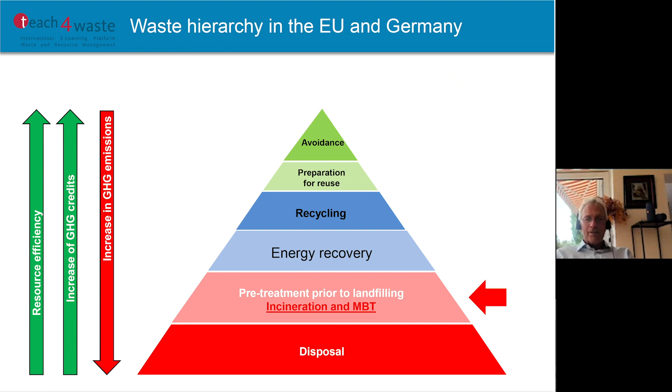So I hope you remember what I have said before in the last 5 minutes. I introduced MBT, what it is, and I talked about the learning objectives. I integrate MBT, that means pre-treatment before landfill, in the waste hierarchy we have in Europe. Then I come to the next slide, and from now on I will start again.

What are the targets or the objectives of treatment before landfill? You see some points, and I will highlight them in my presentation: minimizing of volume and mass, inactivating of biological processes, mainly the reduction of methane emission, immobilization of contaminants because of reduced leachate emission, recyclables—so take out some recyclables like metals and other components—and maybe to produce fuels from waste, RDF, that means refuse derived fuel.

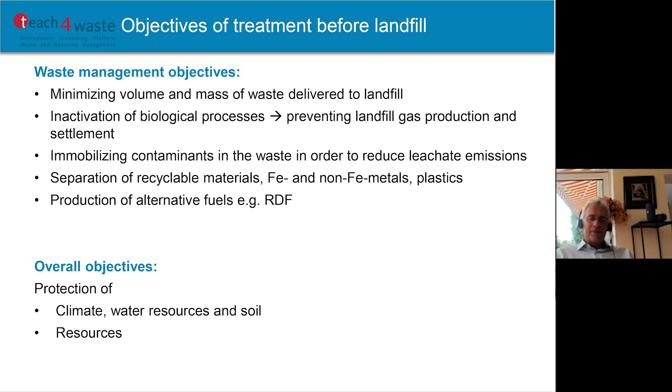But the overall objective of MBT, of treatment before landfill, is climate protection. This is the most important factor, and you will see at the end of this little presentation, I think around 20 slides, why this is so important.

What is the situation in Germany? So 75% of all these treatment technologies are thermal technologies, meaning incineration plants, and 25% are MBTs. We started with incineration in the 1950s, and with MBT more or less at the beginning of this new era—I think we started in the year 2000.

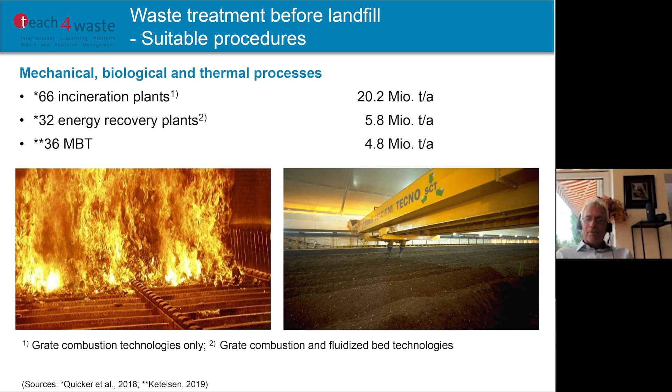But I will highlight today only MBT, because this is part of the biotechnologies we focused on in this little lecture. So the main point at the moment is what kind of limiting values we have for the material which we are allowed to dispose of on a landfill.

We have a special law in Germany created in the year 2001, and we have different laws and requirements for incineration residues—that means slag—and MBT materials. I will focus only today on MBT material.

We have a reduction of total organic carbon in the solid. That means we want to reduce the organic matter which could be degraded in an anaerobic way, so the potential for methane gas production. Second point, we have a limiting value for the wastewater area—the total organic carbon in the eluate—so you want to reduce the organic components in the leachate.

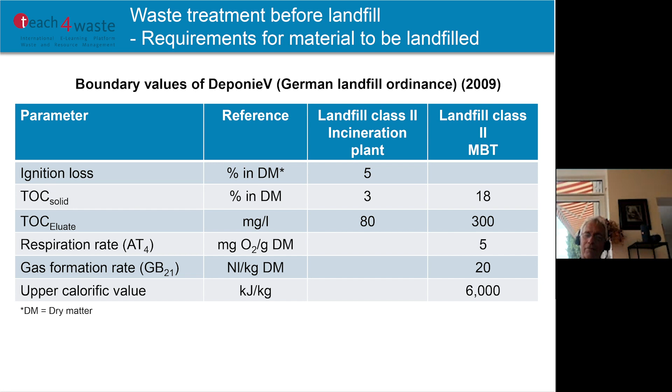Then we have two other parts of limiting values. These values describe or limit the biological activity of the raw material when you dispose of it. And at the end, there is a limiting value only for MBT—this is the upper calorific value. I will explain them a little bit more in detail.

So the first parameters are emission parameters—AT4, that means respiration rate, which tells you how many milligrams of oxygen you need in the material you want to dispose of. Sorry, I missed that here—you have to give in here oxygen, that means O2.

Alternatively, we have another limiting value: the gas formation rate during 21 days, that means 20 liters per kilogram dry matter. You have to know that fresh waste has an amount of around 200, so the requirement is to reduce the activity by around 90%. Both parameters can be used alternatively—AT4, the respiration rate in 4 days, and the gas formation rate in 21 days—the target is to reduce biological activity by around 90%.

And the same applies in the area of wastewater and groundwater protection—also a limitation of organic components. So this is one part of the limiting values.

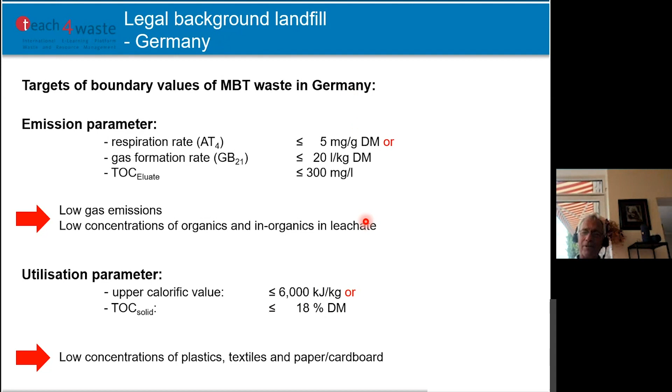So these are emission limiting values, and these are recycling-enhancing limiting values.

The next point: what are the critical components for landfills according to gas production? You remember, when you have waste and dispose of it in a landfill, after a short time you don't have any oxygen left in the landfill material, in the landfill body. So the kind of degradation changes from aerobic—the degradation process using oxygen—to anaerobic degradation, a degradation process without oxygen.

And this is the main problem, because this anaerobic degradation process produces, as a product, carbon dioxide and, I hope you remember, methane. And again, we talked in our first lecture about methane. Methane has a very high global warming potential.

You remember what this is? I hope. There are different kinds of numbers. So you have 25 or you have 28, I know some that are 30. That means the warming potential is, by a factor of around 25, higher than carbon dioxide. This is the definition of global warming potential.

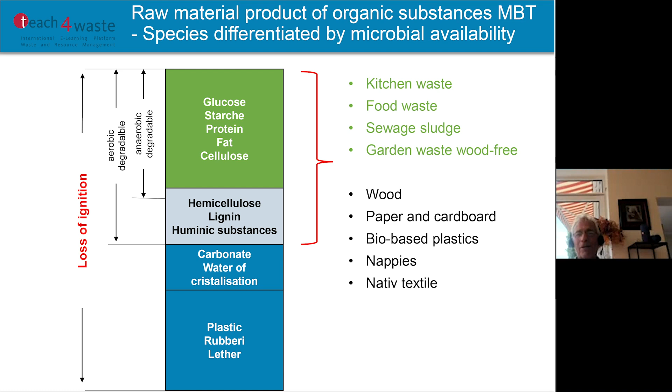And you remember, for example, laughing gas? Remember the number? It's around 300, or 298. This high global warming potential of methane is the biggest problem we have with landfilling untreated waste.

So you remember the technologies of composting and anaerobic digestion. More or less these technologies are all the same, whether you use them for the production of compost or for pre-treatment before landfill. The technology is more or less the same, so I don't want to discuss it in detail.

But the main point is: at first you shred the waste, you screen the waste, and in Germany you separate material bigger than 100 millimeters. There you have paper, textiles, plastic. The other components have a high concentration of organic matter, meaning biologically degradable components.

And you can screen it again, typically in Germany at 30 to 40 millimeters. The remaining plastic and wood you take out to produce high caloric components, meaning you produce a fuel. At the end, you have stabilized organic matter smaller than 40 millimeters.

This is again a typical technology we use in Germany. I think in Brazil there are other ideas. For example, I know some MBT technologies integrate a sorting step, either a manual sorting step or a fully automatic sorting step, so that you can take out plastics and cardboard. So this depends on the targets you have in your community and the targets of your MBT treatment technologies.

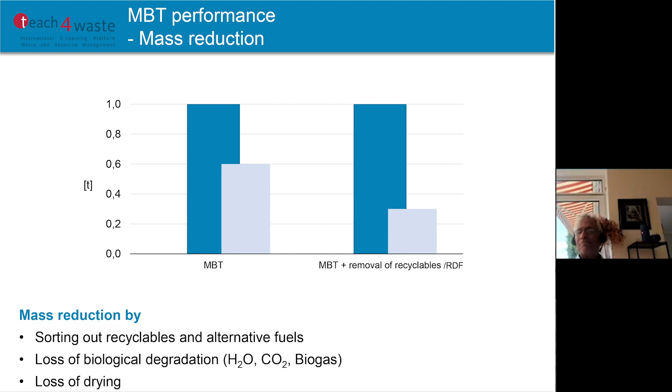And when you compare this, the mass reduction rate is more or less the same as incineration. Incineration also has a remaining amount of slag, around 30%. But you have to integrate, again, taking out recyclables or combustible components. So at the end, this is a combination of mechanical biological technologies with incineration technologies. This is typical for Germany, and I think in the long-term view, you will have it also in Brazil.

So the second point, the second requirement, was to reduce the volume required for landfilling. And in this case it's very important: on one hand you have the mass reduction, but as a second parameter you need the installation density. That means, what is the density of the material you dispose of on the landfill? If you have raw material without any treatment, you have only 700 kilograms per cubic meter.

And when you install it with a caterpillar, if you take a compactor, you can achieve much higher densities, around 0.9 up to 1. But if you combine, for example, compactors with MBT material and taking out the plastic components and so on, then you have an installation density around 1.3 up to 1.6.

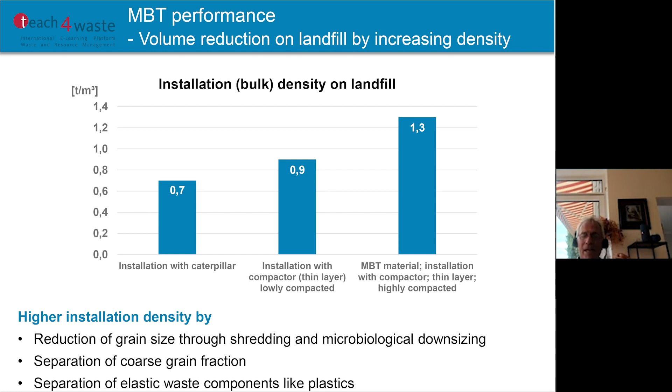And when you combine these two steps, these two parameters, mass reduction and lifting up the densities, at the end you see this as a result.

Requirement of landfill volume per 1 ton of waste: untreated waste is 1.1, MBT with 40% mass reduction gives 0.46, and with removal of recyclables and combustibles it's 0.23. That means a factor of 4 to factor 5.

This is a very important part for the target of MBT, or in general in waste treatment before landfill. So this is the information about mass and volume reduction.

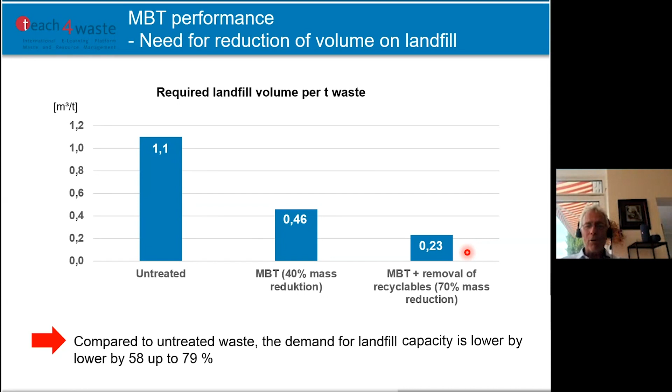Now we look at biological stabilization. Here on this slide you see the GB21 value, the gas formation potential, or gas formation in the fresh material, and its development during aerobic treatment. Here you see the aerobic treatment time.

You achieve, for example, the limiting value of 20 liters per kilogram dry matter. You achieve this number after 8 to 15 weeks.

For Brazil, it's a question whether it's necessary to have this very strong limiting value of 20, or maybe 40 or 60. Here you see what kind of remaining gas potential you have.

Christiane and I have worked with your environmental ministry and gave some recommendations for this limiting value for Brazil. We said maybe it could be totally okay to say 40 or 60 when you add later on a landfill a so-called methane oxidation layer. I will explain a little bit later.

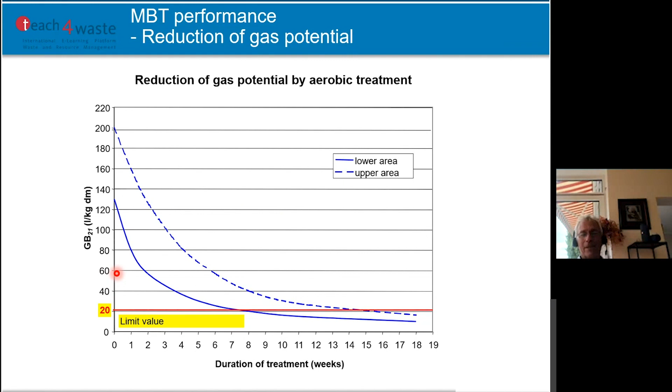Because MBT with this methane oxidation layer at the end has, in the result, the same effect. So it could be very helpful if we take other, somewhat higher limiting values. But I will explain a little bit later.

So again, untreated waste has around 200 liters of biogas per 1 kilogram of waste. MBT material has at the end a reduction of around 80%. We will talk later about this methane oxidation layer.

When you see this number, 200 liters per kilogram waste, or per ton, and transfer it to the global warming potential of 25 or 28, then for 1 ton on landfill you get an amount of methane gas, of CO2 equivalent gas, around 1 ton 700. So 1 ton of untreated waste emits around 1.7 tons, or 1700 kilograms, of carbon dioxide equivalent.

This is the problem and the biggest requirement. We have to reduce this extremely high amount.

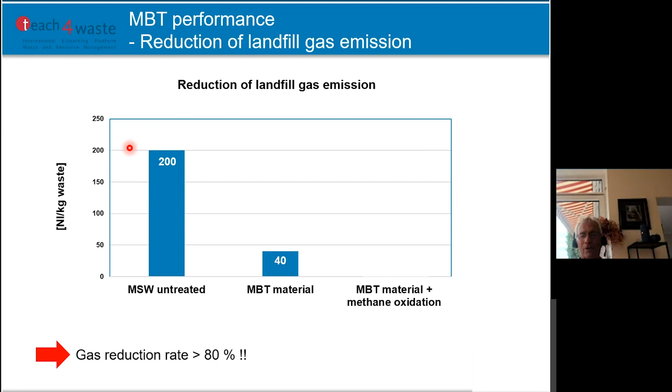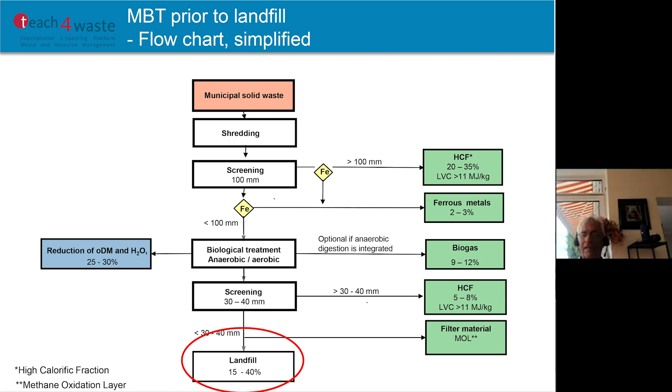So what can we also do with the components we stabilized in the biological treatment? We can produce a special filter material, a special filter layer. When we screen it by 30 to 40 millimeters, the fine grain is more or less a compost, and you can use this compost as a filter material.

For example, you have in this area your landfill. This landfill body produces methane. This methane is brought into a gas diffusion layer, and this gas will integrate into the filter layer.

This filter layer is around 120 centimeters, but in these filter layers we have, by way of diffusion, oxygen. In this process, in combination of methane with oxygen, we have the oxidation process, so the methane will be oxidized.

The methane will be oxidized up to 100%, but only when the amount of methane is low. So you can't use this oxidation layer for raw material or for a fresh landfill, because in that case the methane emission amount is too high.

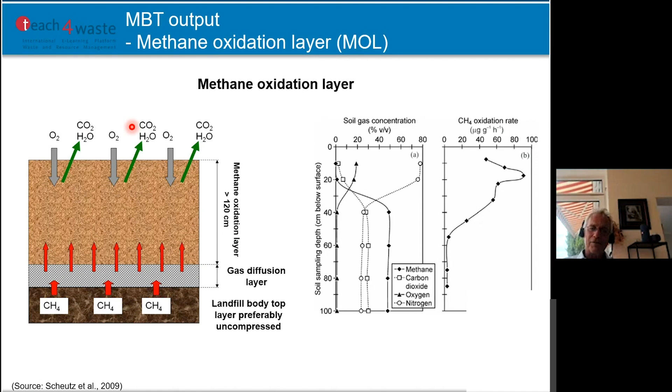Again, when we have a beginning of 200 liters and around 80% reduction by MBT, and a further reduction up to factor 4, we have a reduction of more than 90% by the combination of MBT and the filter material. So up to 90%.

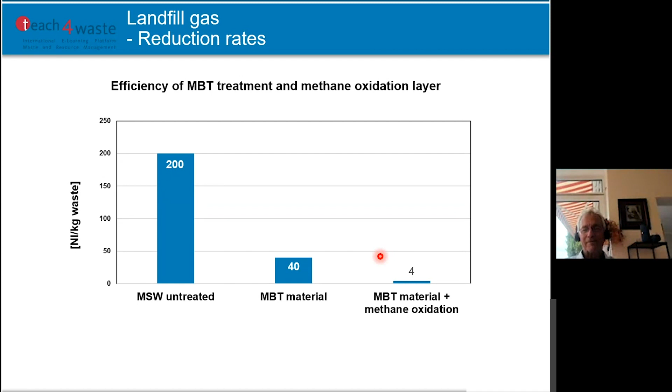What is at the end the main point? The main point is that we don't have greenhouse gas emissions from landfills, only in a very few amount. But at the end, what is very important is that the period of aftercare of treated waste is much shorter. So we discussed in Germany about 30 years, and now we have some landfills. We have to look for the period of aftercare, and after 30 years, we say no chance. We have to prolong the aftercare time by another 30 years. So we now discuss 60 years. But if you have, for example, MBT pre-treated waste, then the aftercare time is smaller, around 30 years. This is a very important part, particularly for the question of operation cost.

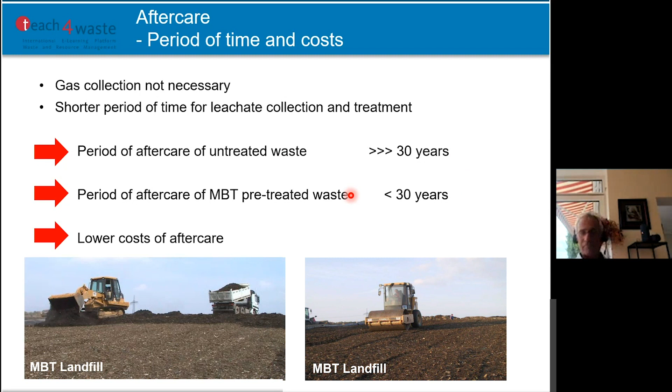Last point for MBT, you remember that I showed you how we can use the composting process for drying. We named it the aerobic drying process. Do you remember how it works? I will explain a little bit later.

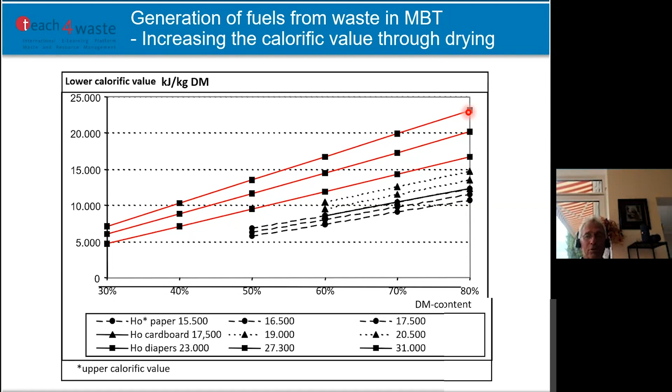Again, the situation: we have some waste components like paper, cardboard, diapers, and so on. If we have a low dry matter of 30%, meaning a high water content of 70%, we have very low calorific values. But when we dry it up to 80% dry matter, meaning 20% water, you can lift the heating value from paper or diapers by double or even a factor of 4. This is the precondition for producing RDF, refuse derived fuel.

So we use a lot of drying systems. We have the conventional ones, the convection dryer, the conduction dryer. You have drum dryers, conveyor belt dryers, but in this biological area we use the aerobic dryer, so we can use the composting process. Or, what is very interesting for Brazil, you can use solar dryers.

So again, what is the process of aerobic drying? It's a little bit of repetition. We blow in dry, cold air. The air is heated up by the degradation energy, and you remember degradation energy is heat. So you lift up the temperature of the air, and by changing the temperature you lift up the holding capacity of the air, the holding capacity of water in the air.

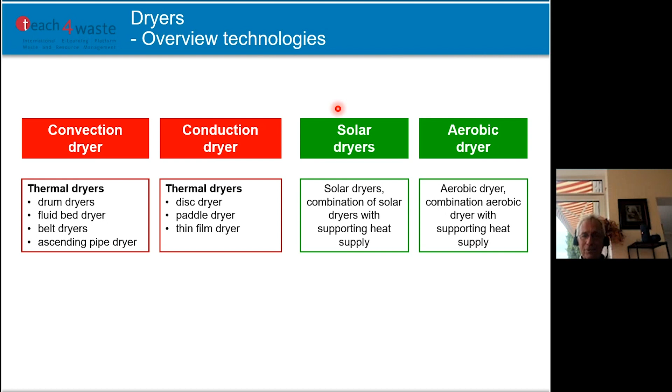And particularly, it's very well developed for different kinds of sludges. We use it, for example, in Germany, in this shitty cold weather in Germany. So the efficiency is okay, but it's much better, for example, in areas like Brazil. The biggest one I know is on the Balearic Islands, on Mallorca. I think it's a drying facility with around more than 200,000 tons of sludge. They dry it in this kind of solar dryer. So I think it's a special technology for warm countries with a lot of sunshine.

Lessons learned: when you have these slides, you can read them and check your knowledge about what you have learned. I hope I've given you some ideas about this MBT technology. Background is that I know there's a huge direction, for example, in development in Brazil to implement this kind of technology.

Last but not least, what can we do, for example, with this RDF, this refuse derived fuel? You know that, for example, the cement production industry is looking for such kind of fuel. And I know you have some companies in Brazil that have huge interest and support different kinds of measures in the area of waste management to produce this kind of material for producing fuel.

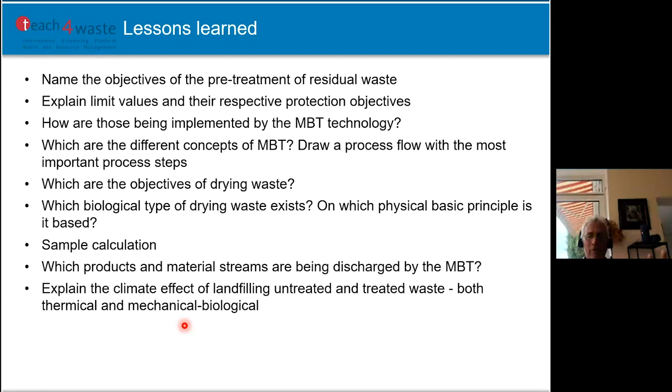This is, for me, a very important development we have here, and I'm sure that all over the world we will see this direction, trying to use fossil-free fuels to reduce the greenhouse gas emission.

So, second lecture today: biotechnologies. We talk about exhaust air emission purification.

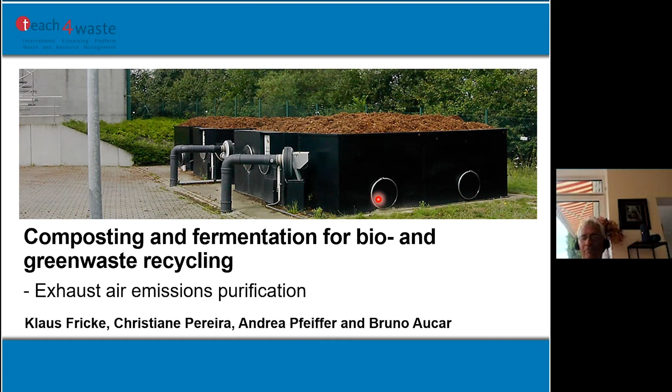And what you see on this picture, sorry, I need my pointer. I will talk mainly about biofilter technology, what you see here on the picture.

So first we have to talk about what kind of emissions we have, what emission categories we have. The main point in former times was odor emission, smelling. But meanwhile, greenhouse gases have the same importance. I think at the moment, the importance of greenhouse gases is much more relevant than odor emission. A special component is ammonia, because it is a precursor of greenhouse gases, a precursor for nitrous oxide or laughing gas. We also have some organic and inorganic harmful components, dust and germs. But today we talk only about odor and greenhouse gases.

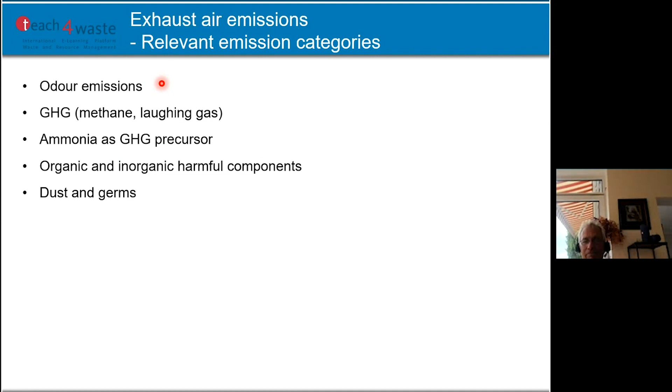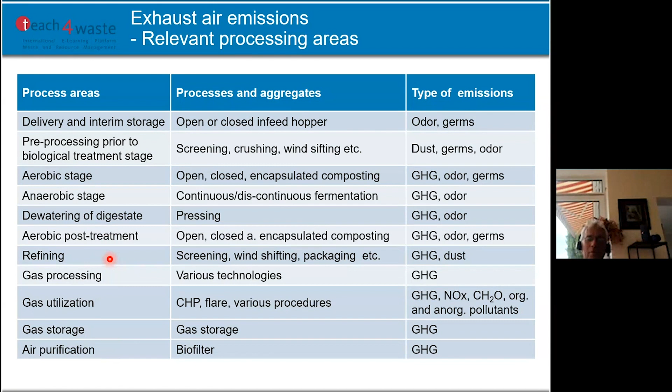The background is that in this first phase, you have very easily degradable organic components. They degrade very fast and need a lot of oxygen. In this time, you have the biggest problem to have sufficient oxygen levels for the microorganisms. And when you don't have enough, then you have the problem of anaerobic conditions. Anaerobic conditions are the best circumstance and the best milieu for the creation of odor components.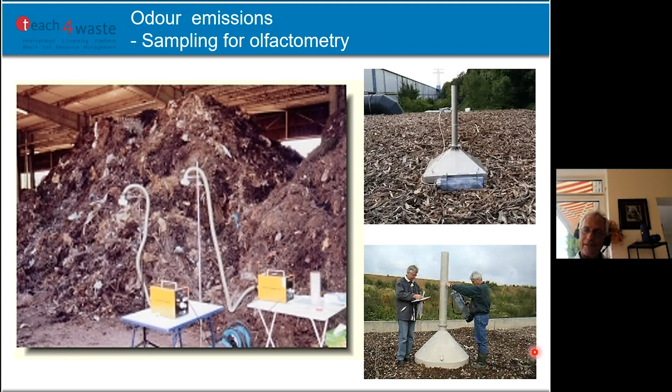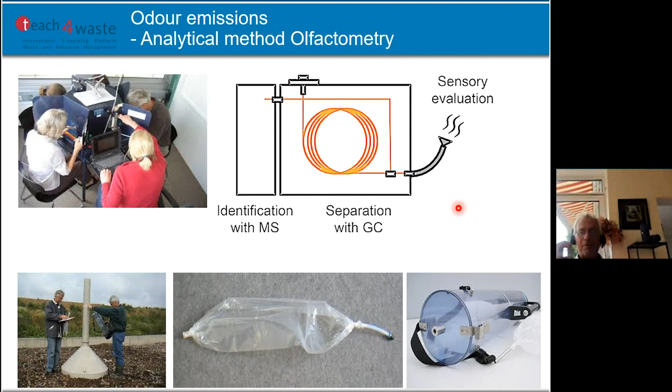As a second step, you take the samples in plastic bags, and then you use your nose - the so-called olfactometry. We have some people, normally students, and you have, for example, the sample giver. You take in your sample, and you have a sample giver for every nose, and you start with absolutely clean air. Then you add step by step your collected sample. At the first moment somebody recognizes the smell, they give a sign, and this is the concentration level of the raw gas - the opportunity to measure organic amounts and organic smell concentration.

Second, greenhouse gas emission during composting and anaerobic digestion. So we look for methane and we look for laughing gas. Here we have composting and fermentation. Now you see composting only 1.4, fermentation 3.7.

And when you consider, for example, the global warming potential, then we have 35 kilogram carbon dioxide equivalent per ton of bio-waste, or 93. At the same level we have with laughing gas. So the fermentation, the concentration and the amount is higher.

Why? Main point of methane is the post-composting process of fermentation residues for the material after fermentation. So you have in your material you bring to the post-composting process anaerobic components, and you have anaerobic microorganisms. So they produce a lot of methane. This is the background for the requirement.

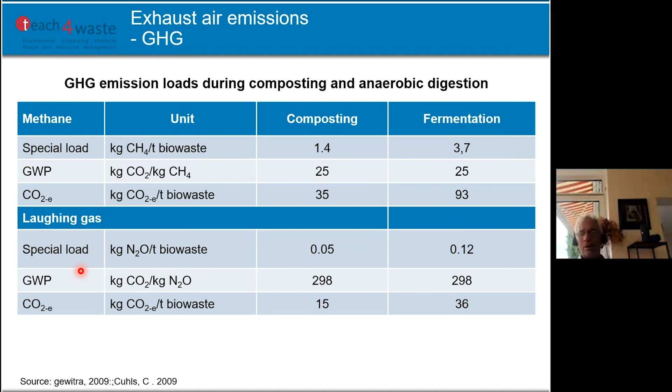So this is the situation, but the most problematic way is these gases, methane and also laughing gas, move into a biofilter in a special concentration and move out of the biofilter in the same concentration. So the efficiency of biofilters for this kind of greenhouse gas is more or less very low, or is zero. We will talk a little bit later about it.

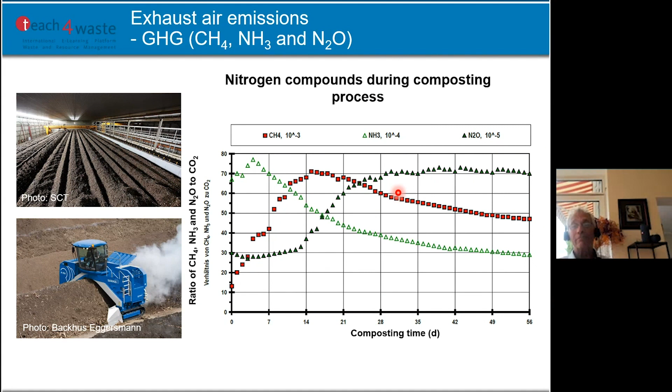So again, this problem: we have ammonia, this is the green line, we have methane, this is the red line, and at the end we have the dark line which is laughing gas. So when we have this post-composting process of residues from fermentation, you have first a lot of methane, but by oxidation, by blowing in oxygen, the amount of methane reduces very rapidly. On the other hand, you have an increase of ammonia, and in the middle of the post-composting process, due to the lack of carbon, there starts the production of laughing gas. This line we find very often in the area of post-composting of the residues from fermentation.

So these are some preconditions. Now we enter the area: what can we do first as measures for exhaust air purification? We divide these measures into primary measures and secondary measures. Secondary measures are, for example, construction of collecting the gas and the purification in different kinds of filter technologies. But the main point is, how can we minimize, how can we mitigate the emission in the process, so that we don't have any emission?

So this depends, for example, on the raw material. If you have enough structure material so that you have enough air pore volume, so that you have enough oxygen, then you don't have any kind of problems with anaerobic conditions. You need the right humidity. So if the material is too wet, you have a very high potential for anaerobic situations, and that means a lot of smell and a lot of methane.

Another point, temperature. Why temperature? The problem is over 60 degrees we have some special products which have a very high amount of smell, of odor. So try to reduce the temperature below 60 degrees. On one hand, the consequence is you have much higher degradation rates, but also you have a reduction of the creation of odor components. So process technologies, sure.

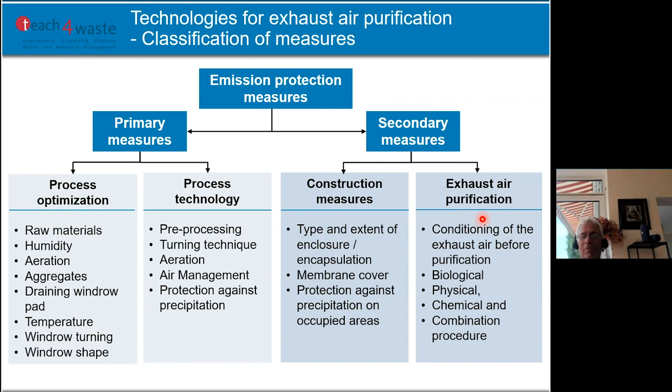For example, turning technologies, aeration technologies, air management, protection against precipitation, and all these technologies are very important for the reduction of the amount and concentration of gas for odor and the greenhouse gases. And the second measures, I mentioned it, we will talk now mainly about exhaust air purification by biofilter technologies, and also by ammonia scrubbers or acid scrubbers. These are the two main technologies I will describe.

This is the reason why we blow in oxygen, why we suck out the air out of the pile, and we integrate oxygen from the outside layer, from the surface into the pile. So we have two options: blowing in oxygen, or sucking out air by taking in oxygen from the surface of the pile.

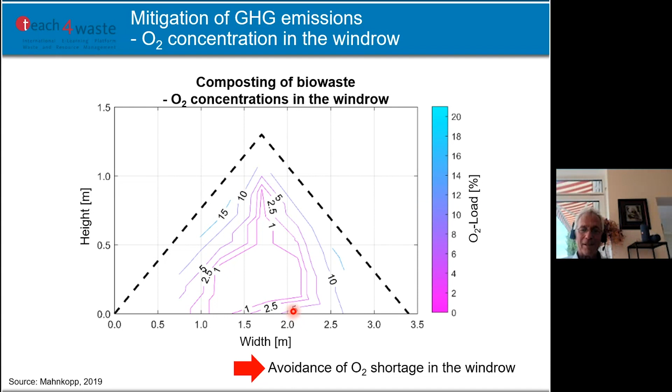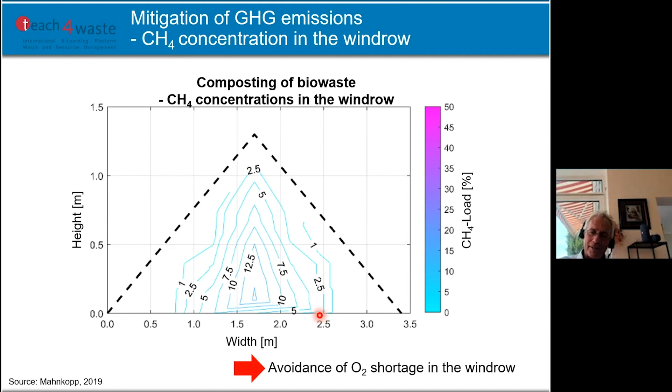So now we've finalized the primary measures, and now we're looking at filter technology. The biological filter technology includes biofilter, bioscrubber, and we'll also look at the washer, mainly the chemical washer, also called acid washer.

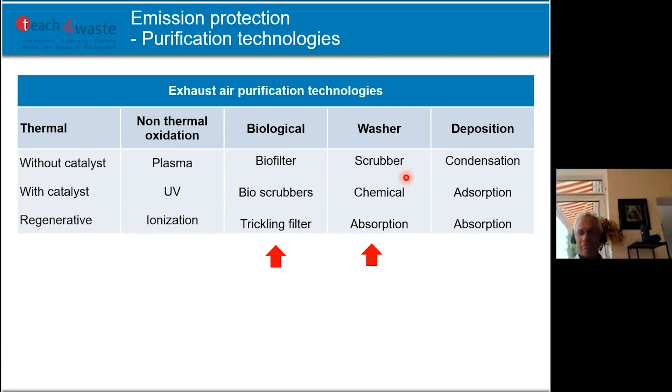We start with more or less 10 requirements. We call it Feldhaus criteria—forget the name, but the criteria are important. This is criteria for filter technology in general, whether biofilter or chemical filter, independent of the type.

The first requirement is effectiveness in limiting emissions. I don't think I have to explain it—the filter technology must have a high cleaning performance.

Plant safety—what does it mean? For example, explosion. We have a lot of problems with dust explosion. When you have dust filters, you have problems with fire protection. So, plant safety. When we talk about biofilters, we don't have to pay much attention to plant safety.

System availability—what does it mean? When you have a filter technology, it has to work more or less 100% of the year, because when you have only 80%, then you have 20% generating a lot of emission. And the people will not like you very much when you have a technology with low availability.

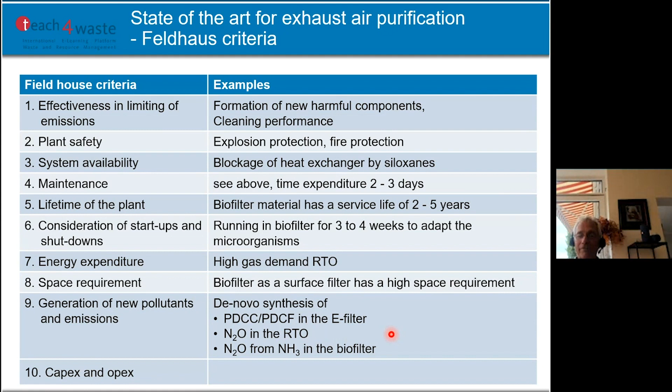Maybe the burning process can produce laughing gas, and we know it from biofilter. When you don't enhance the process the right way, it could be that you produce laughing gas, and the raw material, the precursor, is ammonia. So all these components you have to consider when you design the air purification technology.

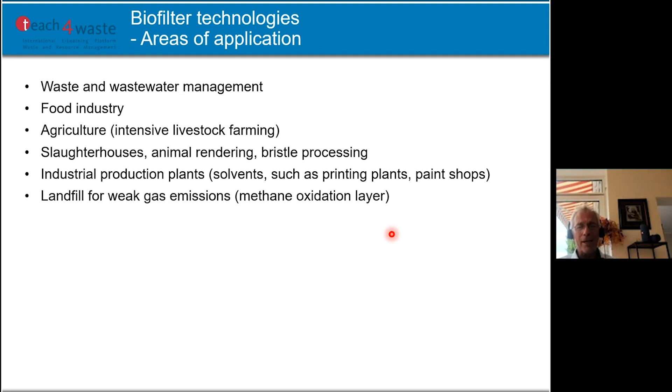And again, to biofilters, we use it all over the industrial area for wastewater management, in the food industry, agriculture industry, slaughterhouses, but also in industrial production plants, for example printing plants and paint shops. So there are a lot of options for usage of biofilter technology.

So, but first, what are the principles of biofilter technology? The principle is activity of microorganisms that biochemically oxidize organics, exhaust air constituents, and adsorption. So the main point is that the filter material fixes for a short moment the organic components, so that the microorganism can degrade them by the aerobic way, by using oxygen. This is the most important thing.

So what kind of raw materials for the application of biofilter can you take? They must be water soluble and biodegradable. Components which are not biodegradable, you can't filter in the biofilter technology.

And the main other point is the temperature is in a very small window. The optimum of degradation rate and filter efficiency is at a temperature between 35 and 38 degrees. You have to pay attention, because if you take the air from a compost facility, it's possible you have 60 degrees in the exhaust air. So the regulation of the air input in the filter according to the temperature is very important, it's a very important question.

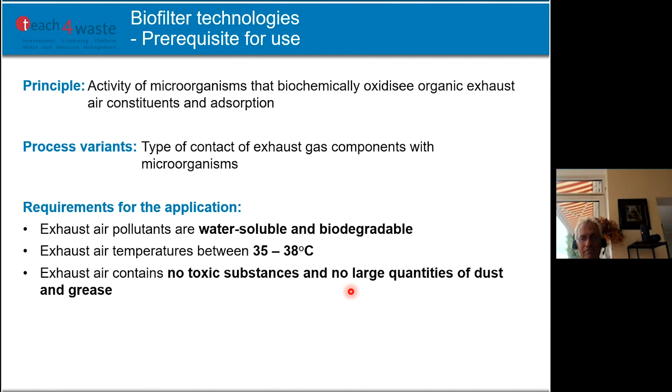And it's also important, so that you have a good throughput streaming through the filter material, that you don't have any dust and grease inside your air. These are the main aspects for the filter material, for the biofilter.

And here you see some design of a filter technology. At first we have the exhaust air from, for example, a compost plant or from an MBT plant. You have an air fan which transports this air into the biofilter. First you have a dust separator, because the dust blocks the air pore volume in the biofilter.

Normally you combine it with the humidifier, because you wash the air, you lift up the humidity, and in this case, in the same step, you clean the air from the dust. And then you have the temperature regulation.

Normally you have some valves so that you can bring in outside temperature. It's not very important to have too low a temperature -- the problem is too high temperature. Again, 35 to 38 degrees.

So at the end, you bring this air into a so-called distribution chamber or mixing chamber, and from this chamber, the air moves through the biofilter, and you take out the purified air. This is the simple process of a biofilter.

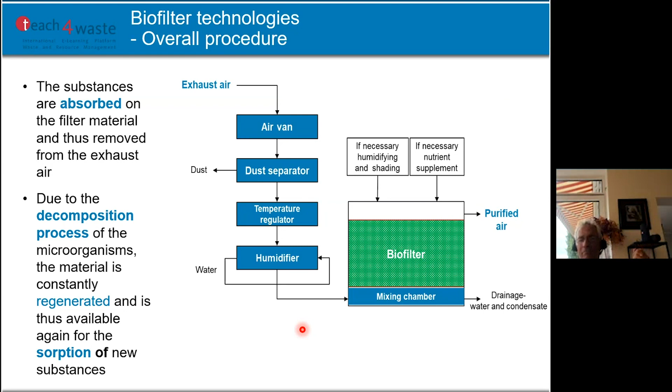And there are different kinds of filters. For example, if you have a huge problem with available space, you can have floor filters, a very simple system. You can have windrow filters -- for example, you can use the post-composting area as a filter system. You can use flat filters, you see here on the picture, and you can use container filters. Again, this is the background for reducing the amount of space.

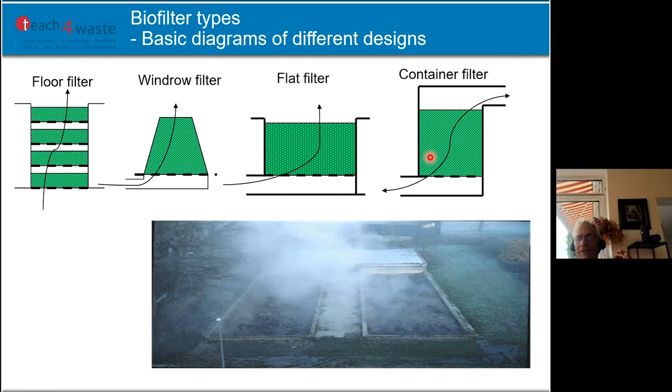This is the normal filter technology you use in the area of composting. And if you have the requirement for extremely high efficiency in degradation rates or purification rates, then you take a biofilter and implement it in a container, because you can much better enhance the water content and the temperature.

So this is the same picture I showed before. And here are some pictures in reality -- typical biofilter technology with the air going inside this area, and the air coming out of the filter is the purified air.

And you don't smell it. I had a group with Brazilian people -- remember, Cristiano, you remember -- we discussed for an hour near a biofilter, and then I said, please, now look, do you smell something? And they all said, no, we don't smell. And I said, this is the filter system, it is running and you don't recognize a smell.

We hope you were convinced about the efficiency of biofilters. Another point, for example a problem for Brazil, is areas with high amounts of sunshine. One of the biggest problems of biofilters is drying out of the filter material, and without water an aerobic degradation process can't take place. So you have to shadow it, or you have to bring water into the system.

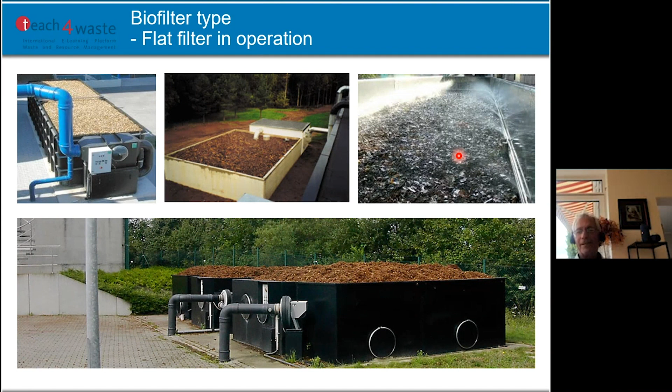When we talk about the requirements for biofilters, the main requirement is availability of 90% over a year, so you can randomize the filter. You have 3 segments of filter systems working independently from each other, so when you have to change the raw material, the other 2 filter beds are still working. So 90% availability is absolutely not a problem.

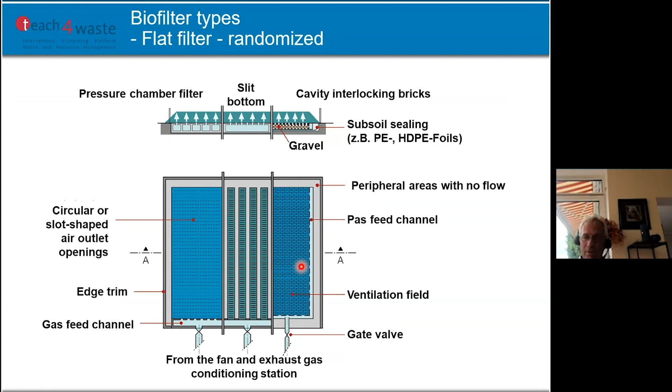Again, the same picture. Before we come to the dimensioning, we have to talk about structure and filter material. What kind of filter materials can you use for a biofilter?

You need a good structure, which means a lot of air pore volume, between 20 and 80%, so that the air can move through the filter material. You also need a large surface area of the filter material itself, so that the microorganisms can fix the organic components and degrade them.

No extreme pH value, for example between 5 and 7. Very good is a high buffer capacity against pH value fluctuation.

Don't misunderstand when I say low rotting rates. It means the raw material, the filter material, you will use over 2, 3, 4, 5 years. So it's very important that this material is not easily degradable, because otherwise after half a year you don't have a filter material anymore, you have compost, and it's not working. So it must be very stable against composting processes.

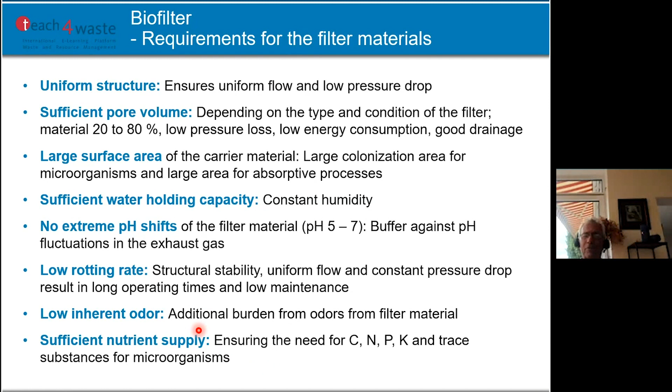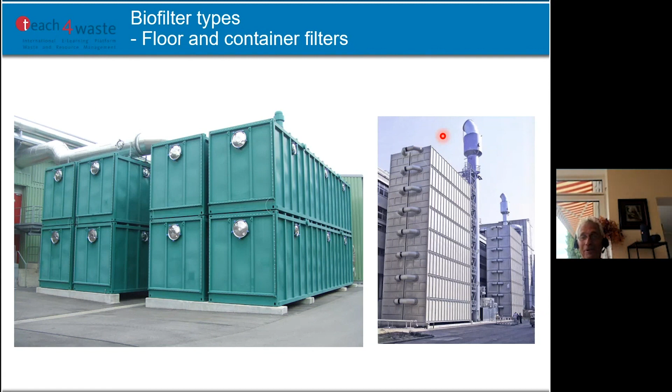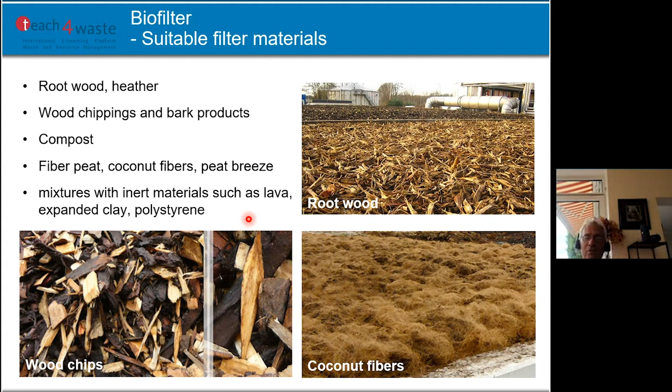Some pictures again - these are floor and container filters, as you see in practice. You don't need a lot of space if you use this kind of filter. Materials you can use include root wood and wood chips - these are the main components. But there are other components too: fiber peat, coconut fibers, for example interesting for Brazil. These are all materials you can use for a biofilter.

Again, filter process parameters. Now we're not talking about material anymore, now we talk about the process parameters. The most important part first is the load - how many cubic meters can I feed into the biofilter.

There we have a number: 60 to 100 cubic meters of exhaust air per cubic meter of filter material per hour. This is a very simple dimensioning number, and I think in Europe we all use this dimensioning parameter in the range between 60 and 100 cubic meters. This could differ if you have special components in the air, but for a normal composting process, this is the process parameter for dimensioning.

The height of the layer is around 0.8 to 1.20 meters, maximum 2 meters. Land requirement depends on how you design the filter, so it's not so important what I give here - you can find all the numbers. It's a question of how many filters, how many flows you have in your filter technology.

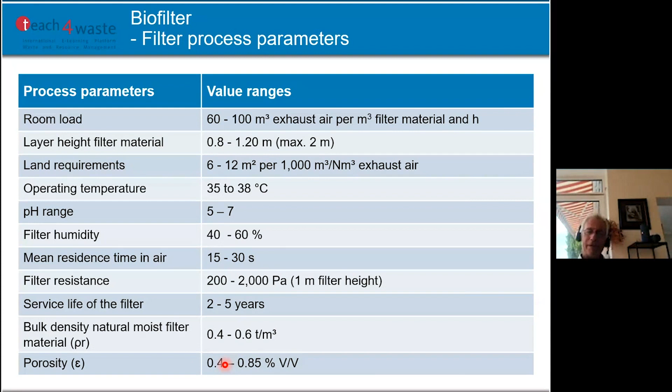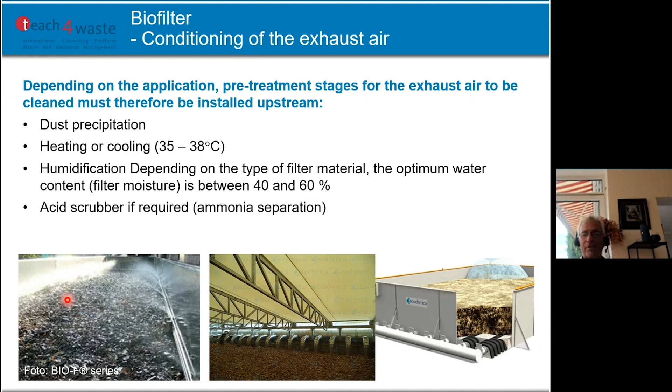So what could happen? Again, you have to protect the filter material against drying. You can irrigate it, you can shadow it, so there are a lot of options.

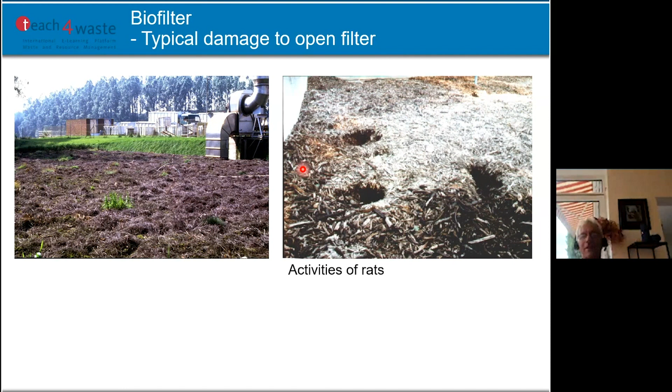You have to pay attention to rat activity. This is typical in Germany when it's cold. Rats move inside the filter material, and rats love compost and compost raw materials. That means in all waste management facilities we have a lot of rats. When they go inside the filter, because it's so wonderfully warm, you get a so-called breakthrough of the exhaust air, so the air is not moving through the filter material, only through these new holes created by rats.

So at the end, we can have an efficiency of up to 99% of biofilters according to odor.

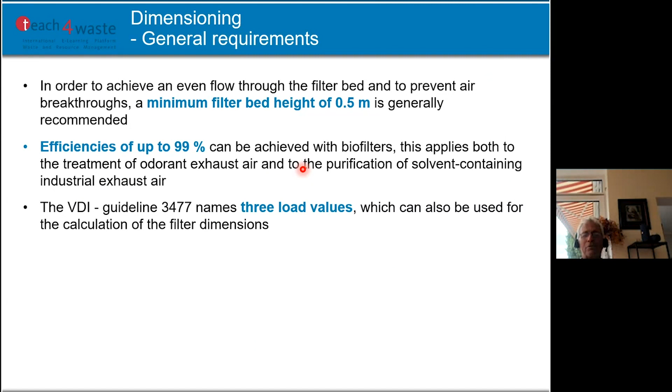So at the end, a short dimensioning. You remember we have the volume loading, the volume of exhaust air related to the volume of the filter, 60 to 120 cubic meters per cubic meter and hour.

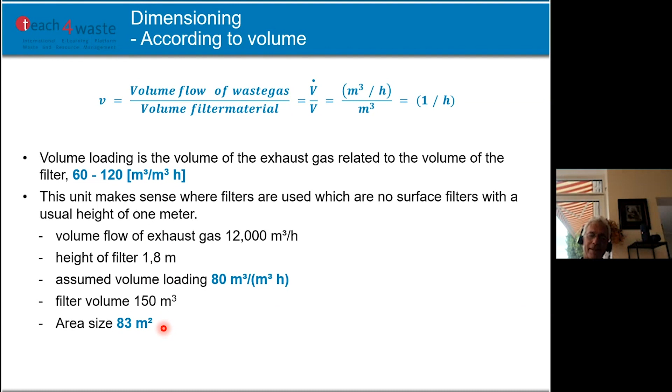So here are some examples. You have a volume flow of exhaust gas of around 12,000 cubic meters per hour. The filter height, in this case, 1.8 meters. And at the end, you have an assumed volume of 80 cubic meters per cubic meter per hour. That means a filter volume of 150 cubic meters, and taking into consideration the filter height of 1.8, the result is an area of 83 square meters.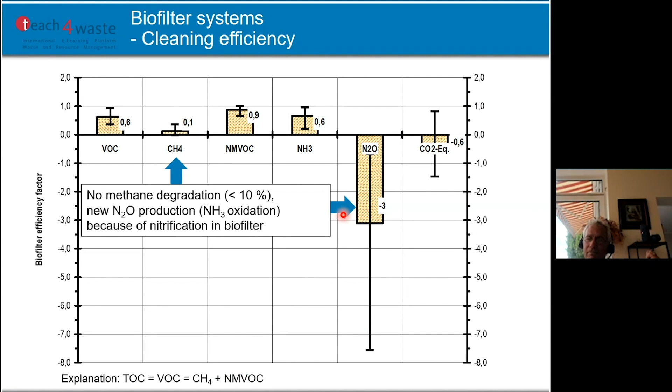How do we reduce the potential for new methane and new laughing gas? Background: the reason for the so-called de novo synthesis of laughing gas is ammonia. And maybe the creation of methane could also be related to ammonia.

We have ammonia in the biofilter in biotechnologies like composting and fermentation, but only in the fermentation process do we have a high concentration of ammonia. This is the reason that, meanwhile in Germany, you must integrate an acid scrubber before the biofilter technology if you use an anaerobic process, that means if you use a fermentation process.

When you take out the ammonia, this NH3, before the biofilter technology, then the problem of de novo synthesis and laughing gas can be reduced to zero.

And what does it mean? It's very simple. You take in this acid, and this acid, this sulfuric acid, reacts with ammonia, and at the end you take out this ammonia in combination with sulfur and nitrogen. But with these components, it's not possible to produce, to come into a de novo synthesis caused by ammonia. So you have this ammonium sulfate.

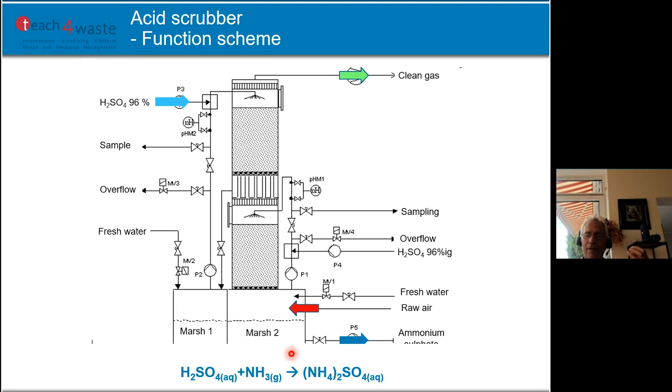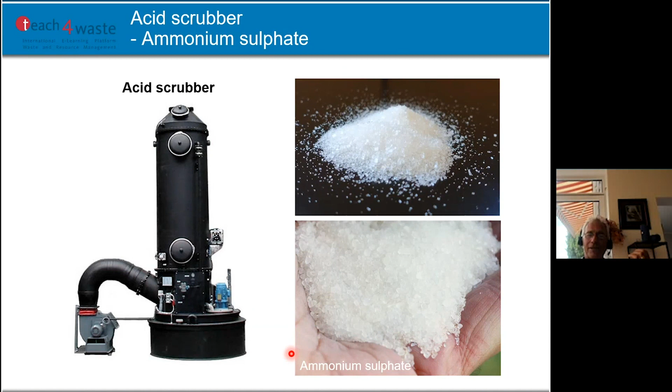And this ammonium sulfate you can use at the end as a fertilizer. So all these products of the acid scrubber we use, for example in Germany, as fertilizer for agricultural use. Meanwhile, on all waste management fermentation facilities, we have this required combination of acid scrubber and biofilter.

And in total, you see the combination of the system. At first, you have the system with the acid scrubber, and the purified gas, free of ammonia, entering the biofilter technology. So you don't have a problem of laughing gas and nitrogen.

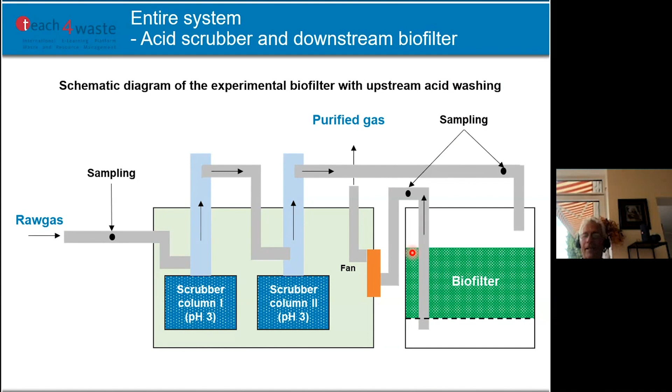So at the end, you can say, with the right dimensioning, with the right process enhancement, particularly according to water content and air pore volume, an efficiency of around 99% according to odor is possible.

Another point: biofilter technology is not a filter technology to degrade methane or laughing gas. So this was my last slide. Thank you very much for your listening.